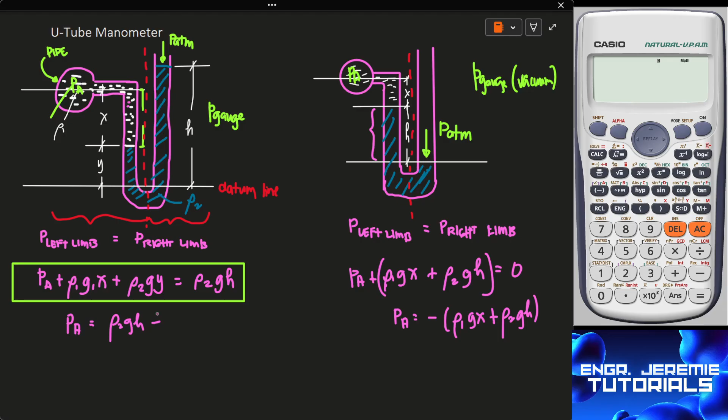Pero kung vacuum pressure lang ang hinahanap, no need for that, nai-add yung P ATM. So, ang mangyayari is magiging PA, or yung pressure at A, is equal to negative rho 1, since ililipat natin sa kabilang side. Negative rho 1 GX plus rho 2 GH. Since itong dalawang ito, ililipat natin sa kabilang side ng equation, so they will become negative. And ito naman, ang mangyayari dyan is magiging PA equals rho 2 GH minus itong quantity ng dalawa na rho 1 GX plus rho 2 GY.

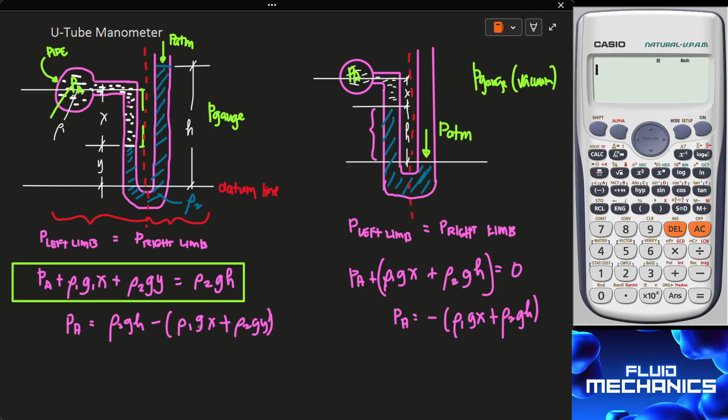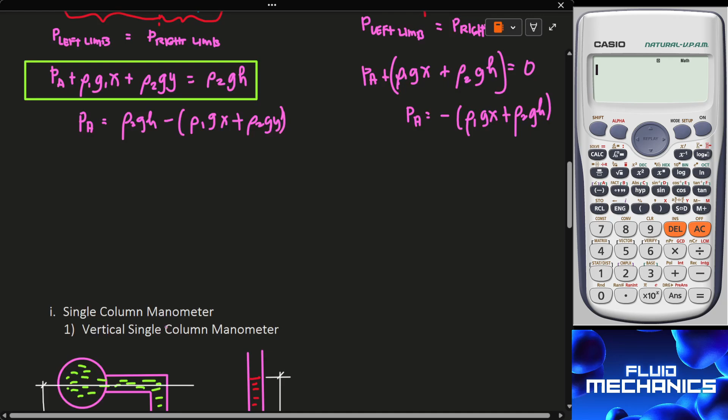So, yun lang yung magiging variation ng mga formulas natin in solving for this type of manometer, yung U-tube manometer natin. So, magkakaroon tayo ng separate video tutorials about this manometer. And then we have the vertical single column manometer. Dito naman is merong tank. Yan, merong tank na for oil reserves natin. Oil reserves ang nakalagay dyan.

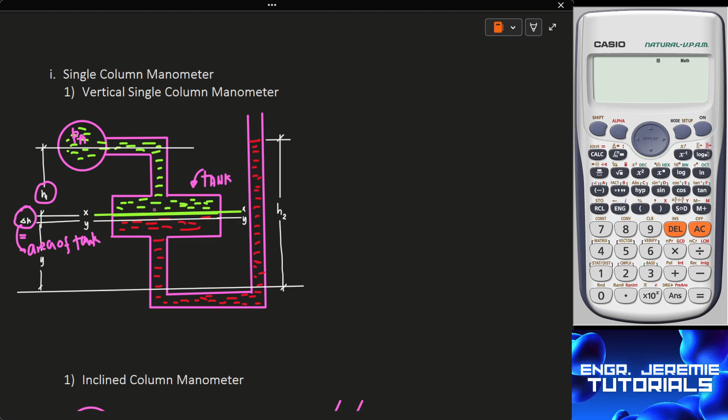So, ito is different naman yung magiging approach ng solving nito, since we will consider the change in height pagdating dito sa part na to. So, gawa na lang natin to ng separate tutorial. So, yung pressure at A is itutulak pa rin niya yung fluid dito hanggang H2. And then, may consider tayo na delta H, or yung drop ng height dito sa part na to, because of the area of the tank. Nakadepende ang delta H sa area of the tank. So, mas malaki yung area, mas maliit din yung drop dyan. And then, yung Y, equal dito sa H2. So, almost the same siya ng U-tube manometer. Sadyang nagkaroon lang ng difference because of the tank here in the vertical single column.

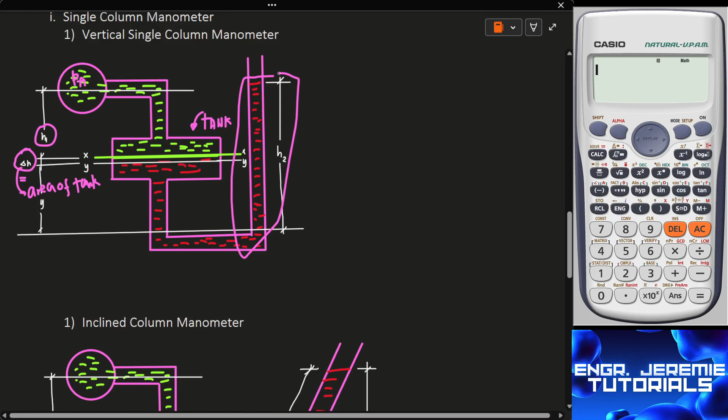And then, ang pagkakaiba niya sa vertical and inclined is that sa inclined, kung kanina, if this is vertical, yung reading natin dito, sa kabila is naka-incline. And ang difference niyan is that given na merong angle ito, angle of inclination yan, so kailangan makuha natin yung vertical height niya. Kasi ang mami-measure natin is the total length nito, the inclined length, pero ang kailangan natin dyan is the vertical height. So, vertical height pa rin ang hahanapin natin dito. So, almost same yung magiging approach.

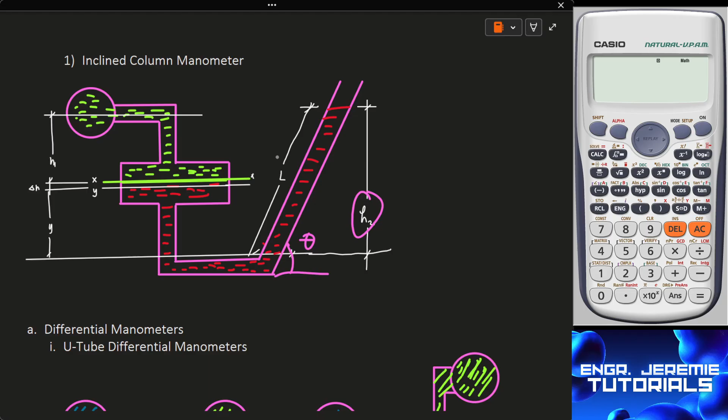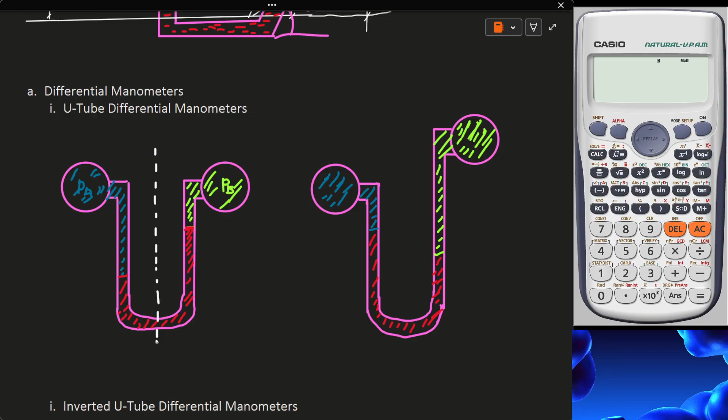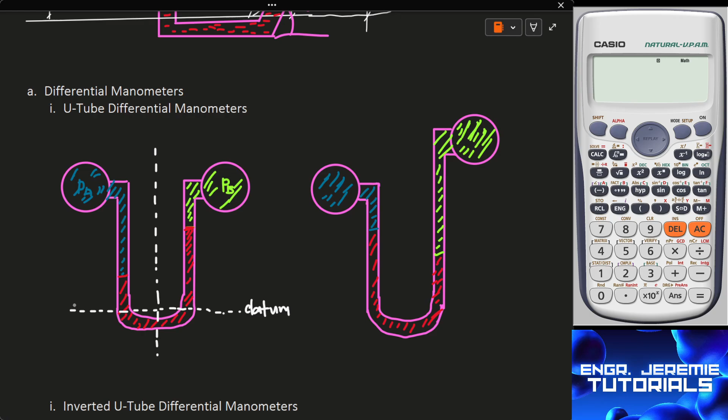Then, we have the differential U-tube manometers. Ito naman, sa example, we have pressure at A. Lagay natin ito. Sa example, we have pressure at A. And dito naman, you have pressure at B, diyan sa part na to. So, dito naman, kukunin ulit natin yung nasa left limb at nasa right limb natin. So, gawa tayo ng datum line dito sa baba. Ito na yung aking datum line. So, the pressure on the left is still equal sa pressure on the right limb.

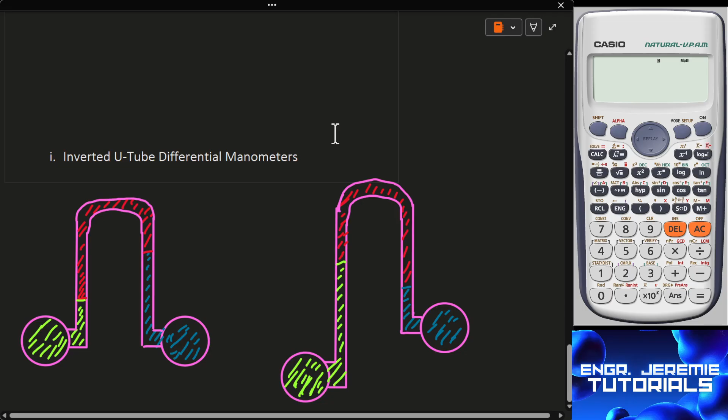Ayusin ko lang. Iusog ko lang. Okay.

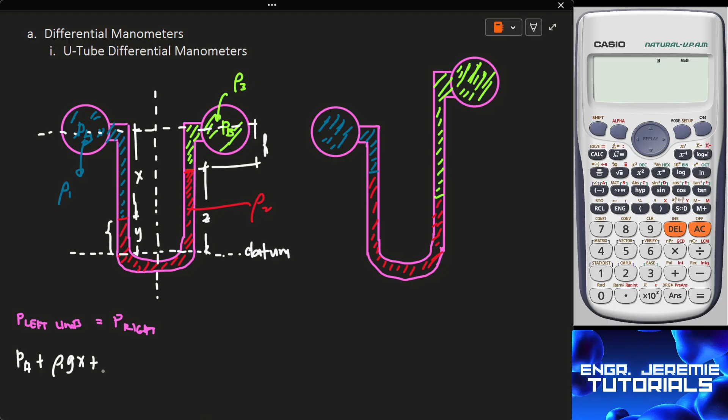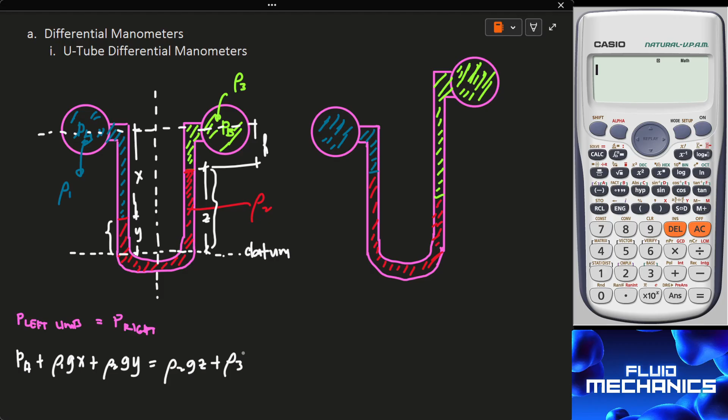So, rho 2 times G Y, that is equal to rho 2 G Z plus rho 3 G H plus pressure at B. So, yun yung magiging analysis of this U-tube differential manometer.

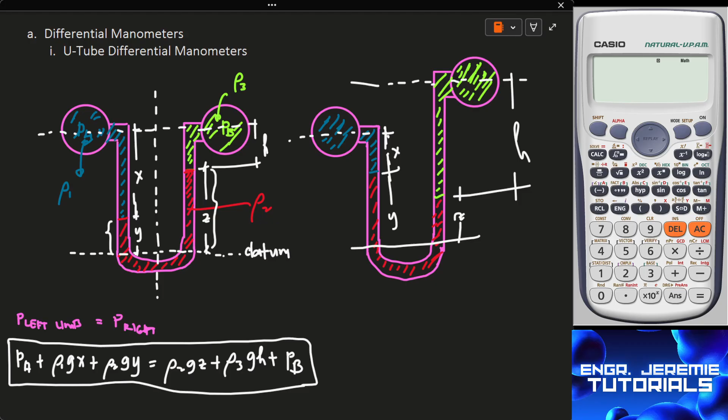And same yan kung in case na iba naman yung height ng isang tube dito. Kumbaga yung height dito is madadagdagan as compared to this X. Yan yung X. Dito yung datum line nyo. Ito yung Y. Nandito yung Z. Pero parehas yan ng analysis as long as yung nasa left limb natin is equal to nasa right limb. So, makikita natin yun sa mga sample problems.

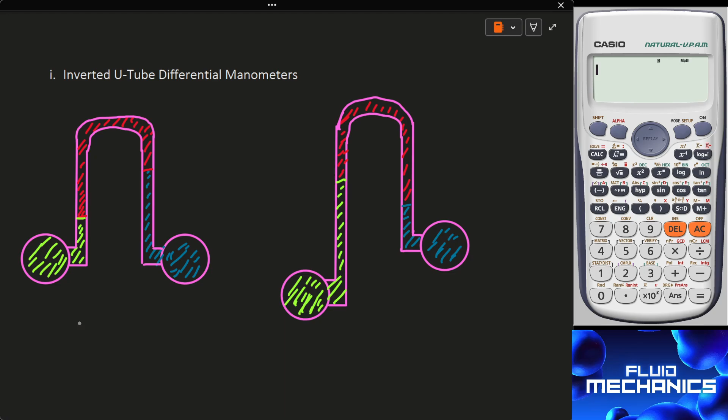Then, we have here the inverted U-tube differential manometer. They are almost identical dun sa kabila. As long as nahanap nyo yung mga height, walang problema. So, parehas yung magiging analysis natin. So, we will try these different manometers sa mga sample problems natin.